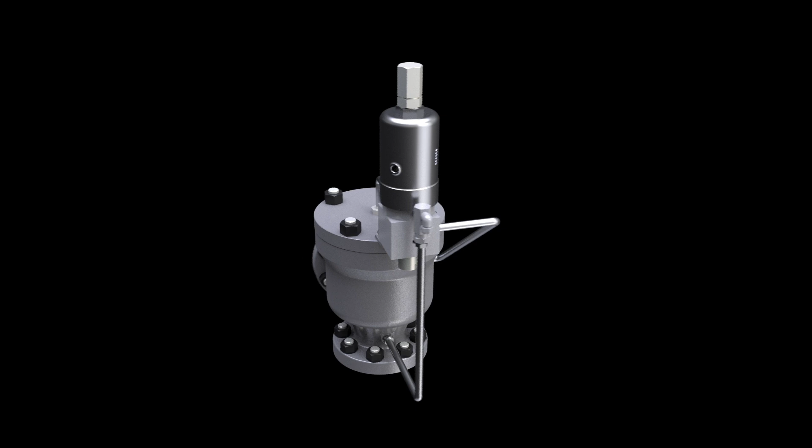The Consolidated 39MV72 is the undisputed leader in performance and efficiency.

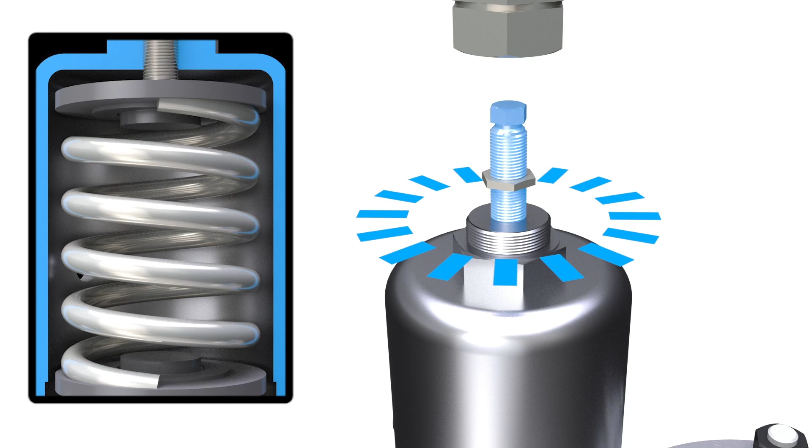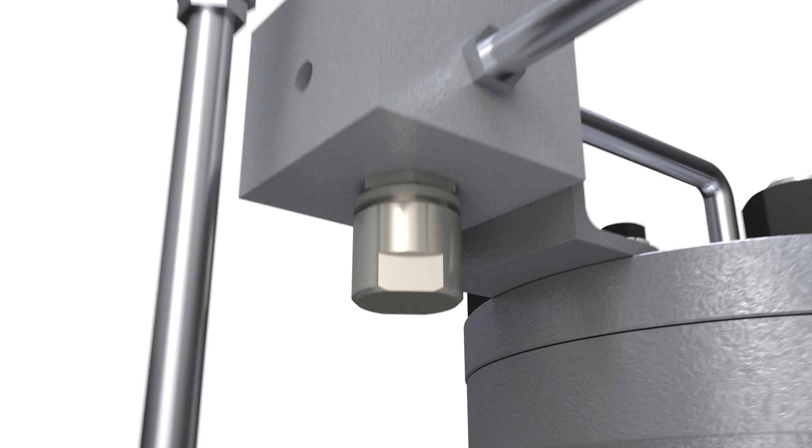The adjusting screw is used to compress the spring, which is the main force determining set pressure. The adjuster bottom requires rotation in or out of the base to position the exhaust seal relative to the supply seal. The position is locked by the adjuster lock nut so that when the supply starts to close, the exhaust starts to open, minimizing a null zone.

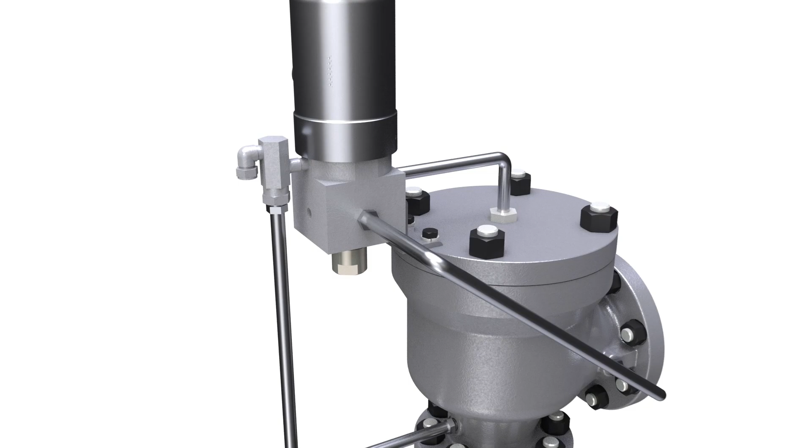The pilot is unbalanced during normal operating pressure. The pilot achieves balance when inlet pressure reaches its vent pressure.

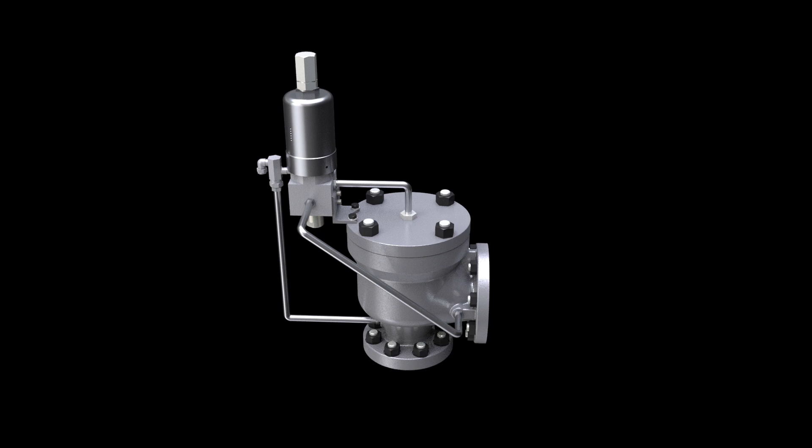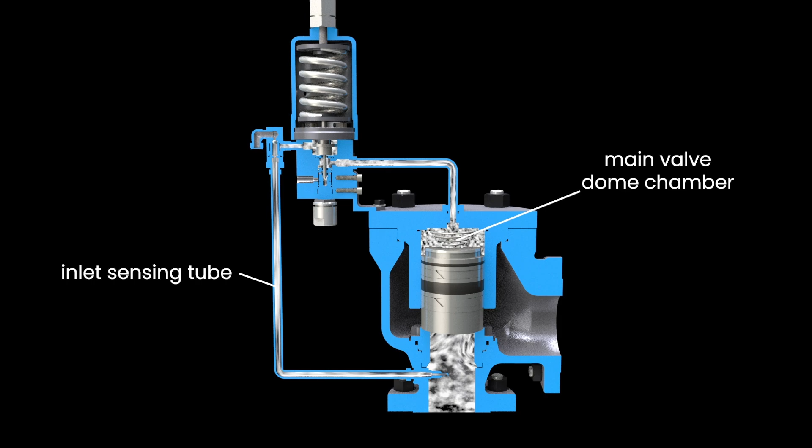As inlet pressure is transmitted from the main valve inlet sensing tube, through the pilot supply port, and into the main valve dome chamber, positive loading is achieved on the main valve disc due to the 30% increase in the dome seal area relative to the inlet seat.

As pressure increases, the load to close the main valve also increases. As inlet pressure continues to increase, pressure will reach the vent point where the pilot becomes balanced.

Venting occurs at 97.3% of set point. When venting begins, the pilot will be in a balanced position. The main valve will be unbalanced and closed.

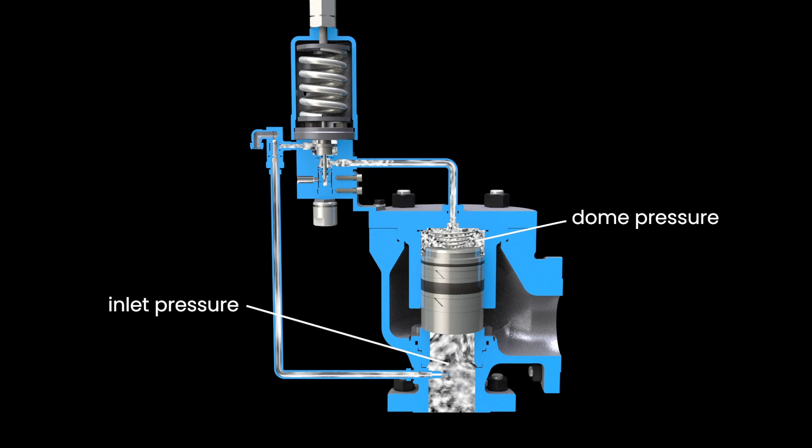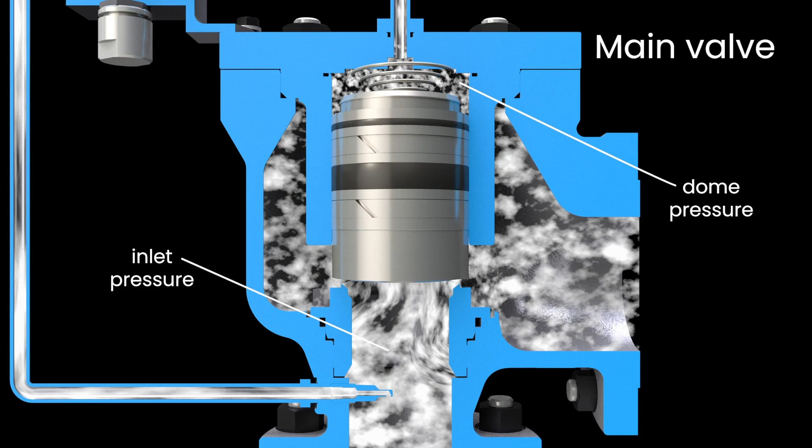As inlet pressure increases to set point, the main valve begins to open. Dome pressure has been reduced by the pilot to less than 70% of inlet pressure. The main valve modulates to a less than full lift position, proportional to the amount of overpressure.

For example, if pressure continues to increase, dome pressure is further reduced to 50% of the inlet pressure, resulting in increased disc lift and increased flow.

When full overpressure is achieved, the main valve will be in a full open position. The pilot has reduced dome pressure, which is now at 0% of inlet pressure.

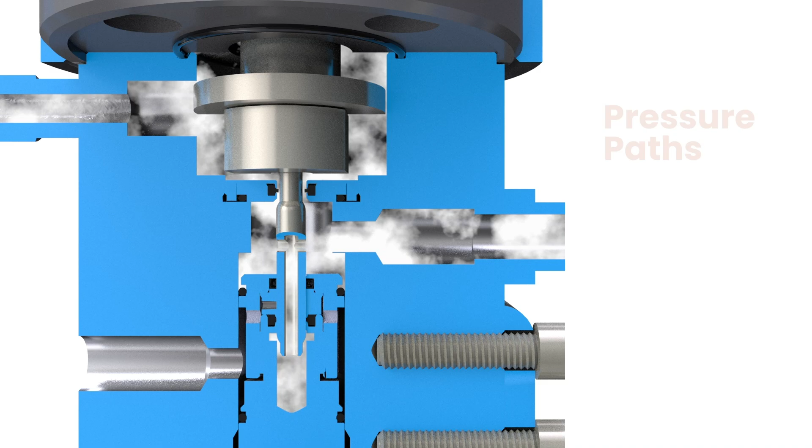We'll now demonstrate the pressure paths as the pilot regulates pressure in the main valve dome. Inlet pressure has increased, so the dome must be vented to achieve balance.

Note that the supply port is fully closed and the exhaust port is open, allowing dome pressure to escape through the indicated path. When inlet pressure decreases, the dome must be resupplied by the inlet, since the exhaust is fully closed. Notice the change in pressure direction.

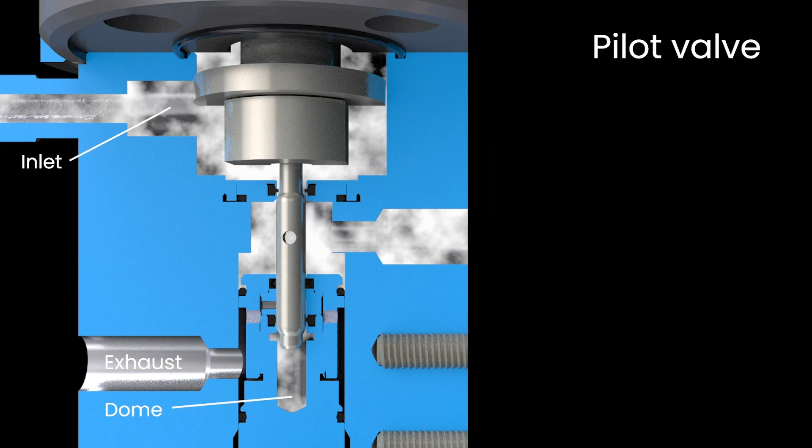The pilot will regulate dome pressure inversely proportional to the increase in system pressure when the pilot achieves balance.

The forces generated in the pilot from inlet pressure and dome pressure cause movement of the piston, which engages and disengages the supply and exhaust seals.

The two separate pressure forces in the inlet and dome areas combine to equally oppose the spring force above.

As inlet pressure continues to rise, the pilot will regulate dome pressure by venting the dome. If inlet pressure decreases, the pilot will close the exhaust and open the supply, increasing dome pressure to achieve balance.

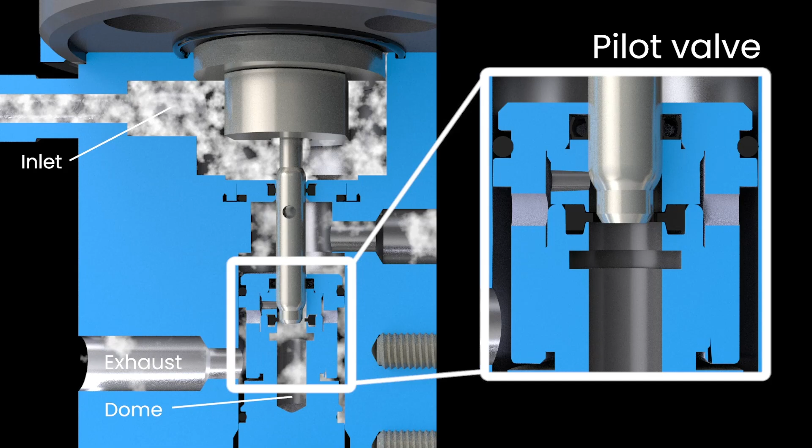As the valve fully modulates at 10% overpressure and reduces dome pressure to 0, the main valve will be in a full open position.

Let's look at a graph of the pilot operation. With the pilot unbalanced, inlet pressure and dome pressure will increase together until balance is reached.

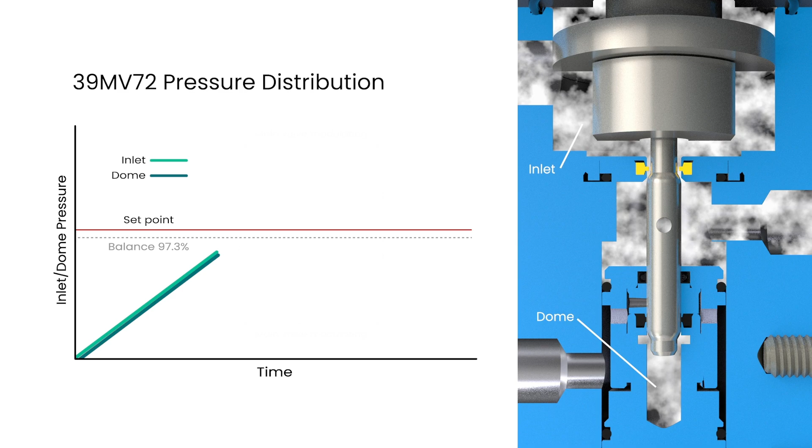Balance is reached in the pilot, and the dome must be vented to maintain balance. Keep in mind that very little fluid is discharged through the pilot exhaust to bring the pilot into balance.

In order to maintain balance, the pilot will either vent or resupply the dome chamber, with dome pressure inversely proportional to the change in inlet pressure.

The graph now shows dome pressure reduced to 70% of inlet pressure. At this point, the main valve is balanced and its set point is reached. The main valve will now start to modulate.

Inlet continues to rise to 10% overpressure, reducing dome pressure to 0. As inlet pressure starts to decrease, the pilot increases dome pressure. Note that the main valve is still flowing during the overpressure span.

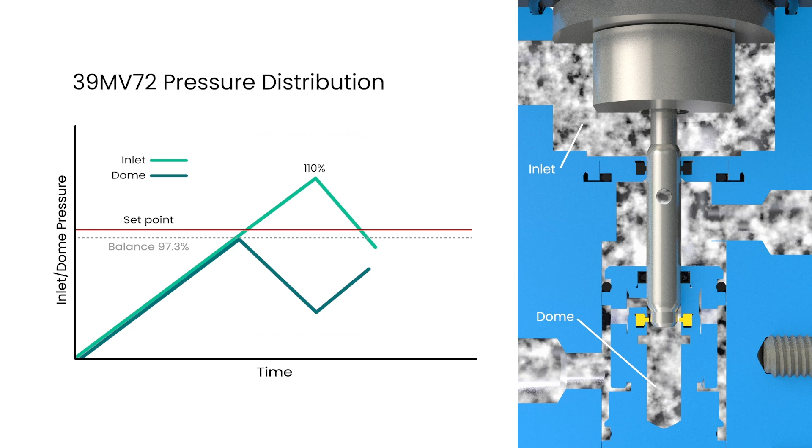As inlet pressure continues to decrease and when dome pressure increases to 70% of inlet pressure, the main valve will close. After closing, the pilot will be unbalanced, and inlet and dome pressures will mirror each other at pressures below the vent pressure.

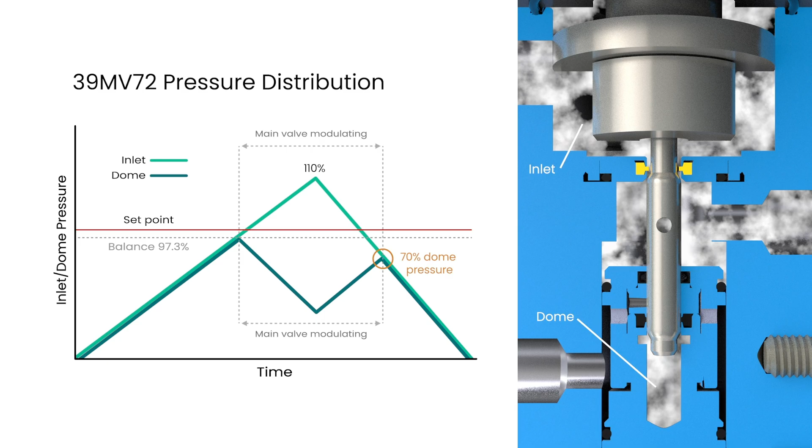The area within the central diamond shape of this graph represents main valve modulation.

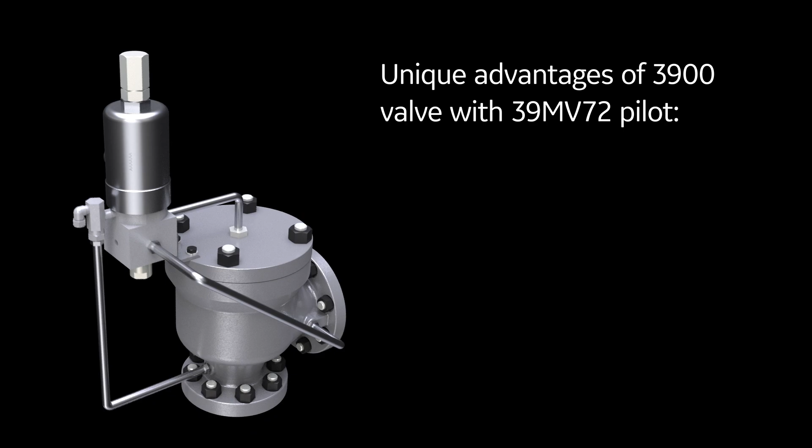The Consolidated 39MV72 is the only modulating pilot valve on the market with an adjustable blowdown. It also features main valve seat tightness up to 98% and pilot seat tightness up to 97.3%, making this pilot valve the undisputed leader in performance and efficiency.

These features combine to enable higher operating pressures, lower emissions, and less process loss.